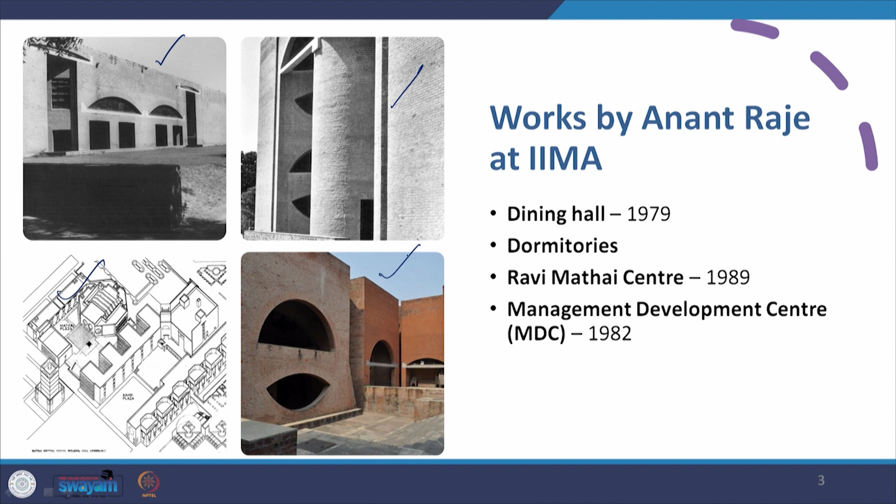The works of Anant Raje at IIM Ahmedabad include the dining hall done in 1979, the dormitories that he designed, the Ravi Mathai Center designed in 1989, and most importantly the Management Development Center, MDC, done in 1982. The MDC was left incomplete at Kahn's death in 1975, and it was completed by Anant Raje.

Raje showed due respect to Kahn by diligently employing his brick vocabulary. For example, when you look at MDC and compare it with the faculty wings of Kahn, you find a tremendous correlation between the brise soleil, or sunbreakers, provided on both facades. The only difference is the number of floors.

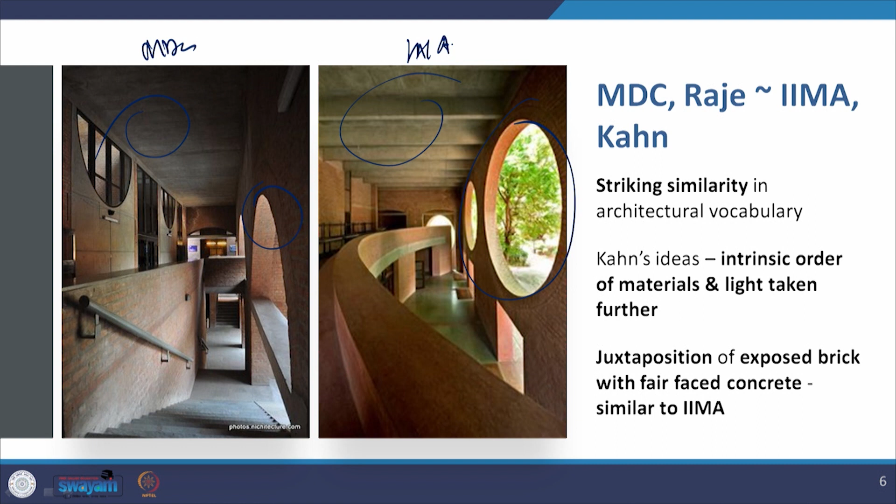Both have a brise soleil provided on a human scale, with a striking similarity in architectural vocabulary. Kahn's ideas of intrinsic order of materials and light were taken further by Raje. There is a juxtaposition of exposed brick and exposed concrete as in the works of Kahn, which Raje takes forward in the MDC. This is the example of IIM Ahmedabad, the main campus designed by Kahn.

So MDC happens to be a school within a school, within IIM Ahmedabad. It is a complex organized around a landscaped court, similar to the idea of the LIK Plaza, around which the institutional area of the old campus was designed.

So we have the LIK Plaza here, the lecture theatres, the library, the faculty wings, and the dormitories behind it. These three dormitories you see have been designed by Anant Raje, whereas this entire set has been designed by Kahn. So this is where the MDC is, the Management Development Center.

This is where the Ravi Mathai Center is supposed to be, and this is the dining hall that was designed by Anant Raje.

So here when we look at the MDC, what you find is two wings of guest rooms extending from the teaching block, and these are the long sides of this court like the LIK Plaza, but the quadrangle gets completed with walls enclosing the court, and then there are trees.

Now please remember what I told you in the last lecture, that the LIK Plaza, though not having a wall as the fourth side, does have trees at a distance that visually complete the quadrangle or court. Here in the case of the MDC, it happens practically - there are walls provided at the edge and trees behind it.

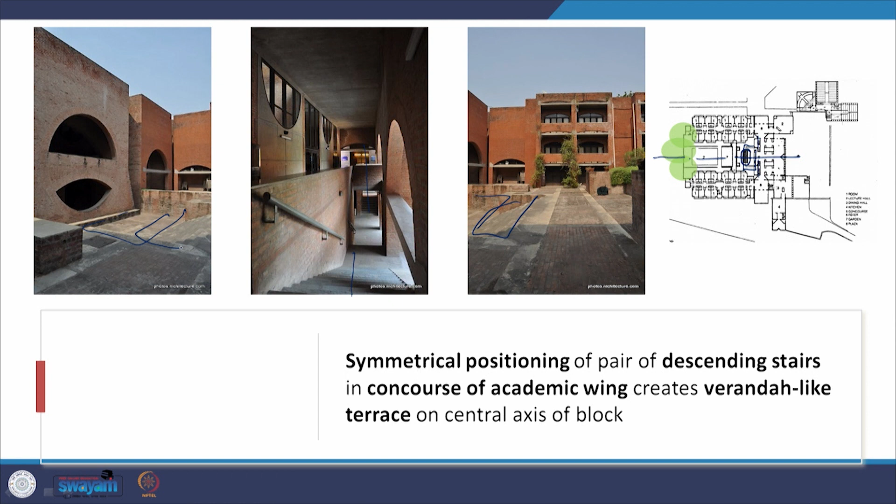Now there is a comparison between this and Newman Hall by Hasmukh Patel, which I taught you earlier. This also has rooms on either side, then a wing here, and this court or quadrangle is completed by the auditorium on this side. The vocabulary of the rooms is straightforward Cartesian brick, exposed brick and concrete structure, whereas the auditorium is totally different from the rigid symmetry, being a completely different geometrical composition that completes the quadrangle and becomes its focus.

In the case of Anant Raje, again there are rooms on either side. Instead of this wing, they have this entire academic block, but the quadrangle does get completed. This can be one of the visual devices you might find helpful in your design studio when you are faced with spaces like this.

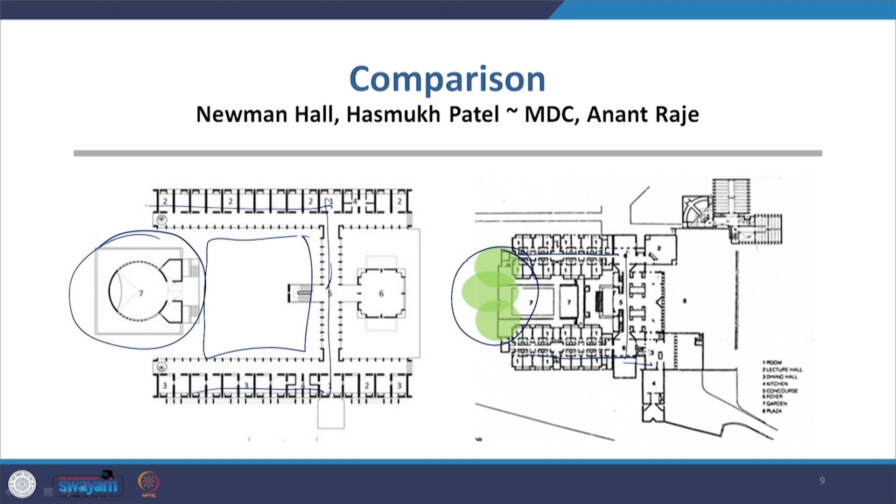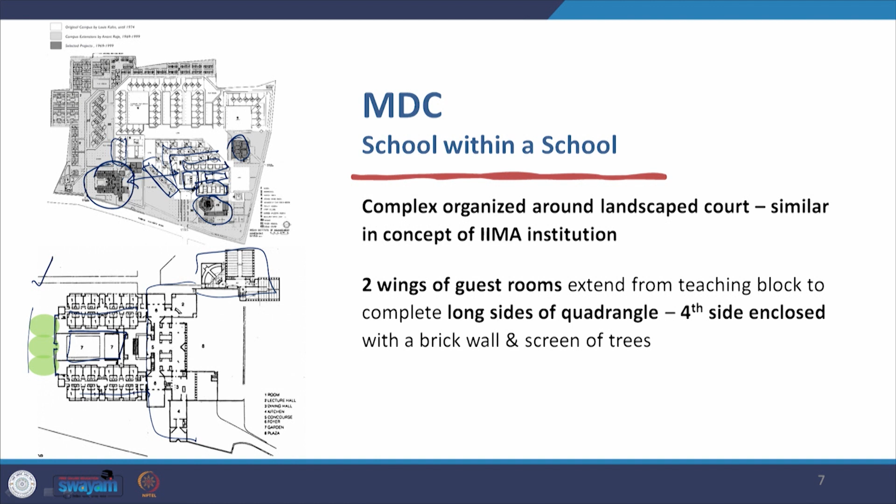The court itself is a scaled down version of the IIM Plaza, referring to the overall intimate scale of the MDC. If you go back to the actual plan of the complex, you find the MDC is planned behind the faculty houses and on the side of the dormitories. That is where the scale of the IIM Ahmedabad campus lowered to a more intimate scale, particularly in the faculty housing. So when he composed the MDC behind it, he was away from the monumental scale of the IIM Plaza's institutional area, and closer to the intimate scale of the faculty houses. My perception is that Anant Raje therefore went in for a more intimate scale.

When he brought down that scale, he also brought down the scale of the court itself, and increased the number of elements that would make it more intimate. This is a very interesting thing he is trying to do here.

He is trying to coordinate the court with the overall composition. In the IIM Plaza, the overall composition of the plaza surrounding buildings are on a massive scale, so the plaza radiates and accentuates that massiveness by being massive itself. If you move on to Chandigarh, it becomes even bigger, because Chandigarh is not just one big building, it is a series of big monumental buildings: the assembly building, the high court building, what would have been the governor's palace on the other side, and the central secretariat behind the assembly building. So the overall plaza accentuates the overall monumentality of that vast composition.

Here the composition and the plaza or court are linked together in their scale. This is important: if you were to provide intimate scale buildings with a monumental or very vast plaza or court, there would be this kind of disconnect, and the two wings of the court would be very difficult to connect together as one composition. You can take it or leave it, but this is a suggestion I am making—this is what Anant Raje does.

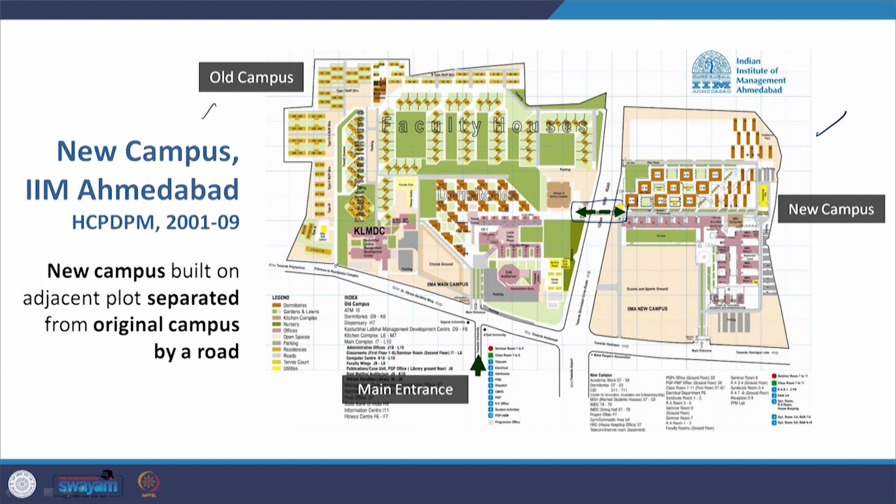There is the three-stage development: the main campus, which is the institutional area. You find the library, the theatres, the faculty wing, and the dormitories behind it from the aerial view. These are the dorms done by Anant Raje, and somewhere here is the MDC which you see, and on the other side is the design done by Bimal Patel.

So the three-stage development is the contribution of three amazing architects: Louis Kahn, followed by the next stage of young Indian architects, Anant Raje, followed by the generation of modern architects practicing today, Bimal Patel. Three wonderful architects at three different junctures coming in to complete the campus of Ahmedabad, all doing remarkable work in their generation. Both Indian architects evolved designs which are in relation to Kahn's design and pay tribute to it.

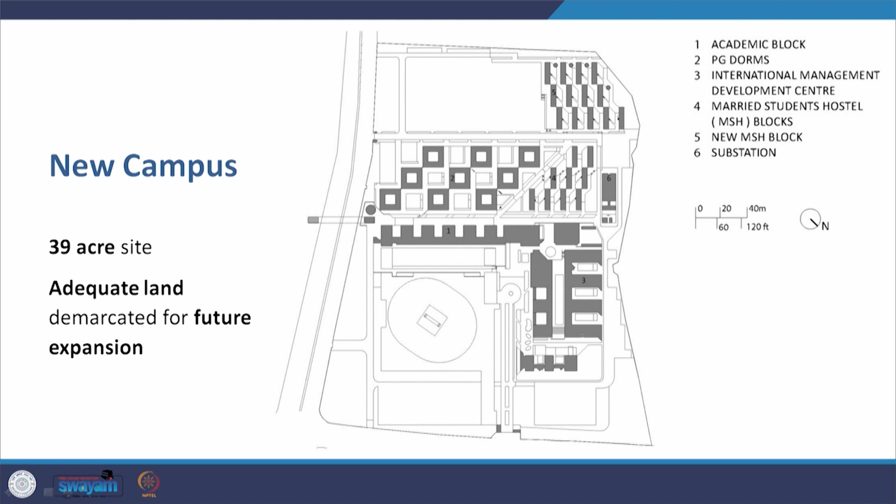The two campuses are connected by this underpass, and this pedestrian passage is a pivot that connects and binds the two campuses together.

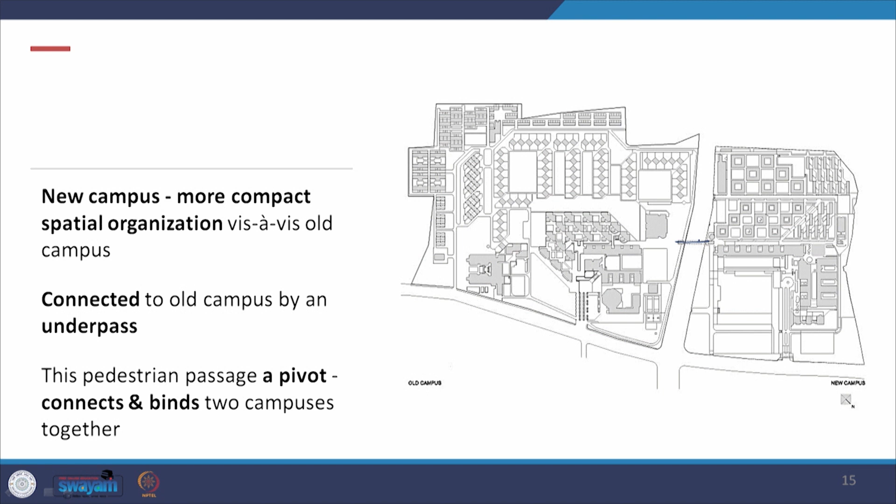Why the underpass? Let's look at that. It's a successful example to address the pedestrian movement issue while bridging disconnects within cities. In this case, it happens to be the same institution with two campuses with a road in between them, so the option of the overpass was overruled.

Why? Primarily because of the harsh climate. Having an underpass does away with the impact of the harsh climate, plus I believe it is also an aesthetic statement. An overpass may not have been as aesthetically pleasing; it would be an unnecessary intrusion on the visual at road level, whereas the underpass simply disappears.

Socially, it's been said that users tend to deal with descending first and ascending later much better than vice versa, which would happen in an overpass, where they would ascend first and descend later.

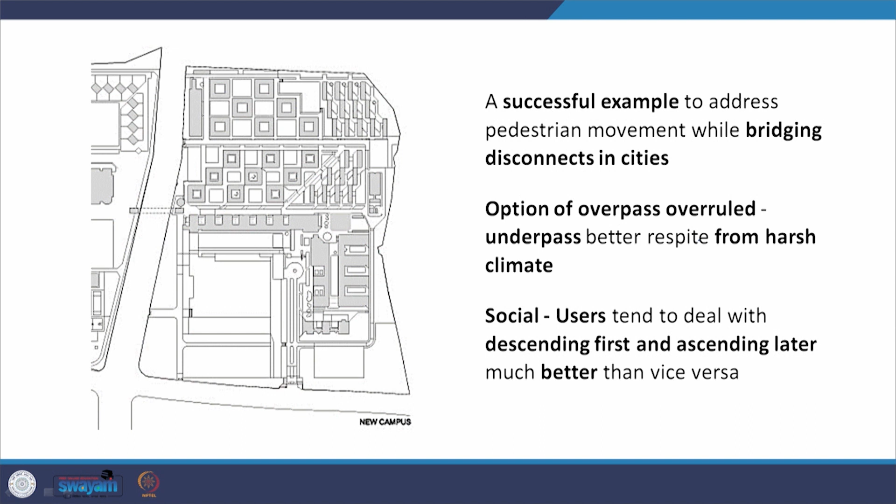This is a 130-foot underpass which also doubles up as an exhibition space for the institution, and it exhibits the works of Louis Kahn.

This is the example of the new campus, where you have the lecture theatres, you have the dormitories, and this is again part of the main block.

The focus on circulation is by using elevated corridors as principal ordering devices. They tend to bring the whole campus to a certain order by connecting them through the elevated corridors, which happen, for example, to be here. This is the same corridor, looking at it from a different view.

Why ordering devices, or why ordering principles? We'll have to go to Francis Ching to understand that through his book Architecture, Space and Order.

Order without diversity leads to monotony or boredom. Diversity without order leads to chaos. So the sense of unity has to be done within variety. Now that creates an ideal situation.

The ordering principles are visual devices that allow for varied and diverse forms and spaces of a building to coexist perceptually and conceptually within an ordered, unified and harmonious composition. This I am borrowing from the work of Francis Ching.

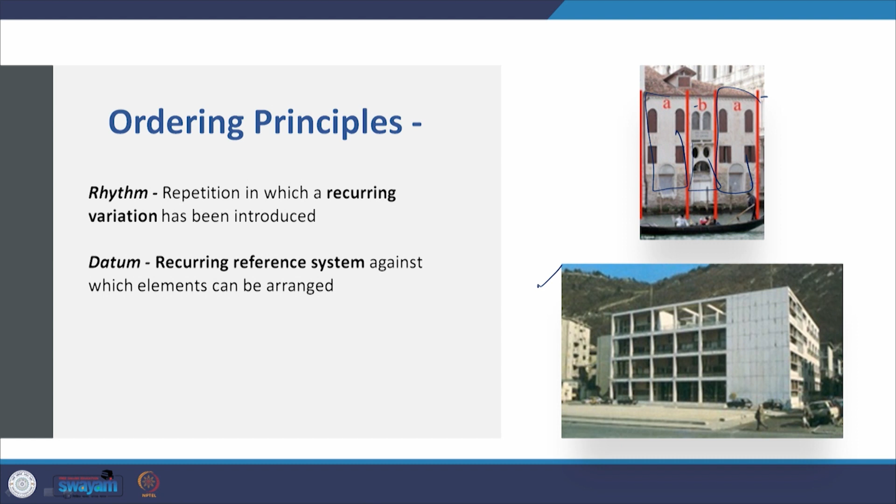Then there is datum, like in this building in Italy, which is a recurring reference system against which elements can be arranged. So we have looked at axis, symmetry, hierarchy, repetition, rhythm and datum.

Two things worth remembering: more than one ordering strategy can be used in a design—it can have axis and symmetry, rhythm, hierarchy, all put together. Also, there are many buildings and spaces not ordered purely by the six principles I've talked about; they may derive their order from other formal choices or general form-making principles.

In this case, the ordering device happens to be an elevated corridor. The architecture in general of IIM Ahmedabad's new campus is late modernist, maintaining consistency with abstraction of forms and geometric expression in relation to the old campus. The similarity is in massing—its monumentality with human scale—plus the overall composition itself and geometrical elements like circular cutouts, etc.

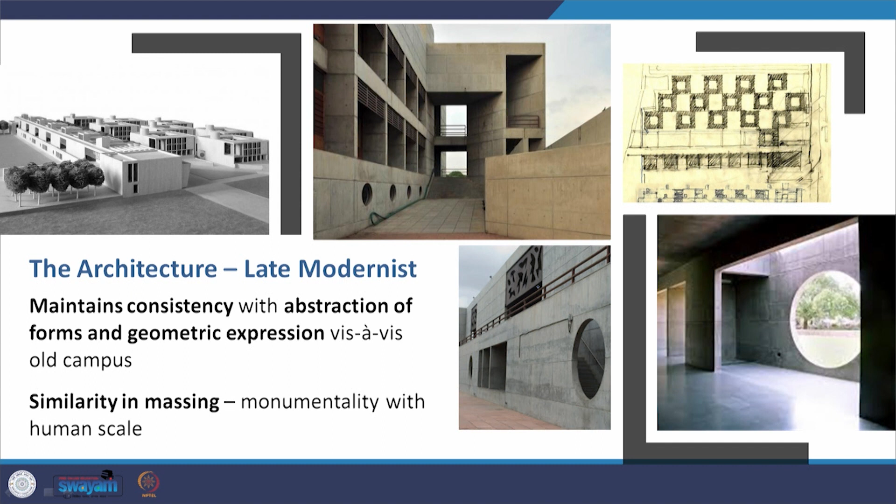We look at the position of the building on the new site, and the manner in which they connect with the old campus, like the use of diagonal geometries in the layout of the dormitories here in the new campus, similar to what happened in the old campus.

The use of materials and compositions uses abstract forms and large plain surfaces, along with circular cutouts similar to the old campus. There is an overall sense of restraint in the architecture. Even if the facade is monumental and expressive, it is completely unornamented, and the building material is exposed.

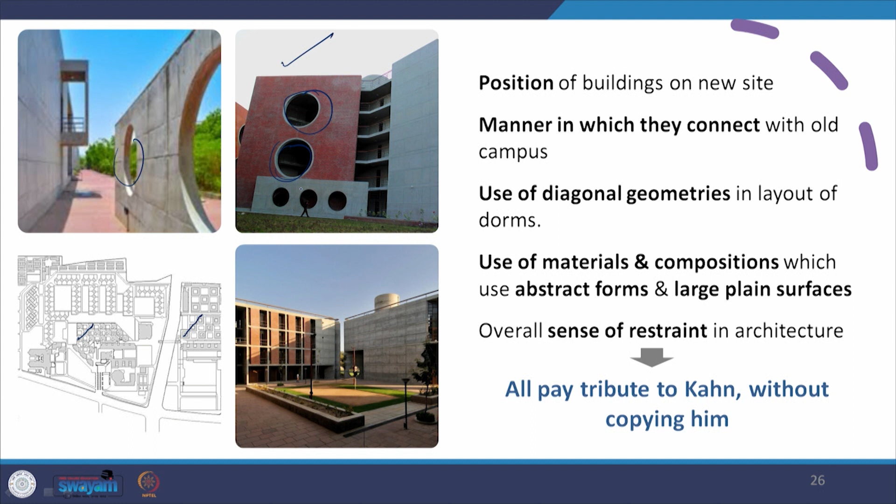All of this pays tribute to Kahn without actually copying him verbatim.

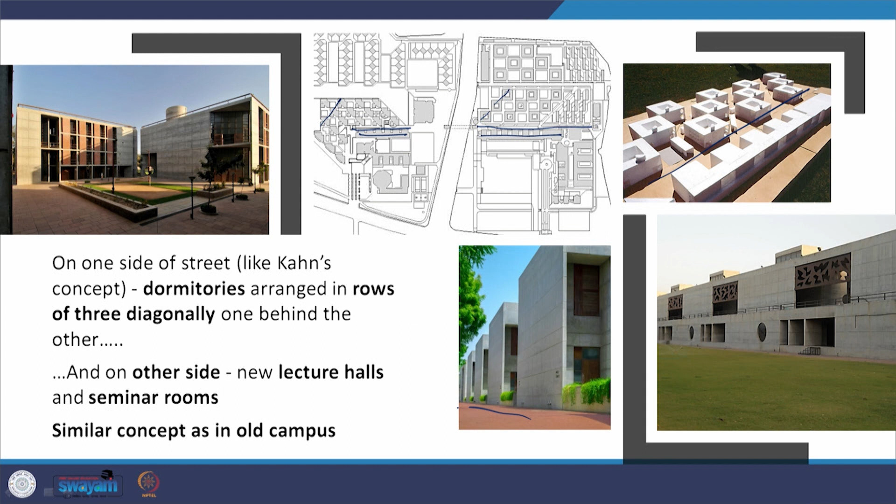On one side of the street, like in Kahn's concept, the dormitories are arranged in rows of three diagonally, one behind the other. On the other side are the lecture theatres, as in the work of Kahn. In between is a road, a vista similar to the old campus. The new campus is an example of architecture conscious of Kahn, but not imitating his palette or grammar verbatim.

The buildings are designed in exposed concrete and brick with fenestrations combining mild steel and wood. As in the old campus, the cutouts and fenestrations are generally devoid of any glass, standing in silence without steel or glass.

Of course, there are windows which we haven't specifically looked at, but here we see them clearly in the design of the dormitory. This is again a comparison between the visuals of the old and the new.

Look at this exposed concrete corridor of the new campus, and this amazing play of light on the brick facade in the old campus, versus the amazing play of light in exposed concrete by Bimal Patel. Bimal Patel is able to create the same poetry of light and shade that Kahn generated in IIM Ahmedabad.

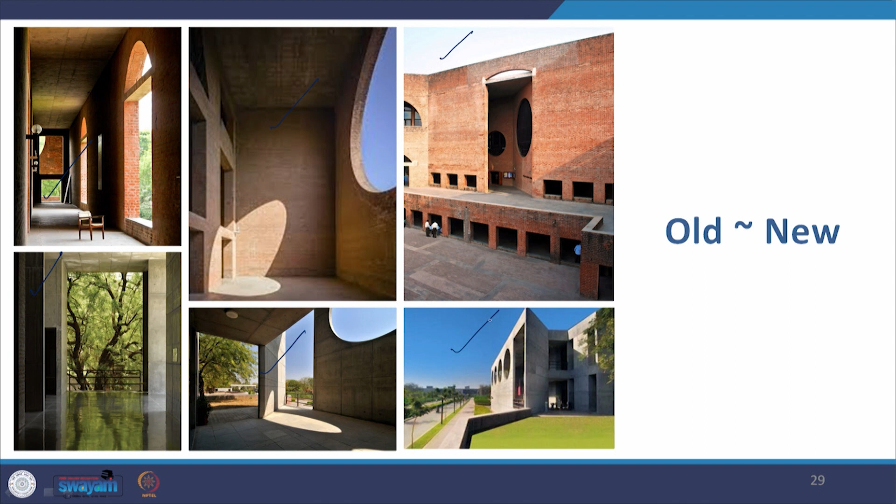There is this monumental facade with circular cutouts, found here in exposed concrete in the new campus, and again the example of diagonal walls that reappear.

There are deep verandas similar to both the works of Raje and Kahn. You find these deep verandas in the new campus by Bimal Patel, and the public areas are also designed for accessibility for the disabled. This is an addition in the new campus, since inclusive design has become an important focus today.

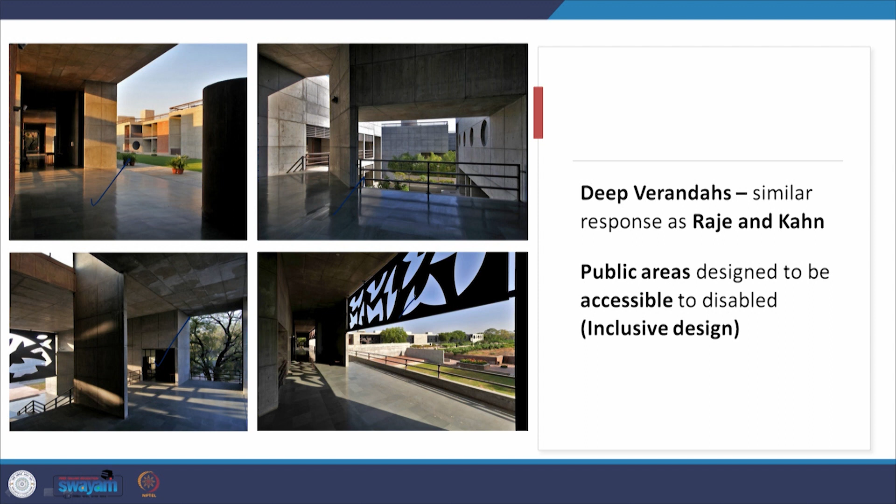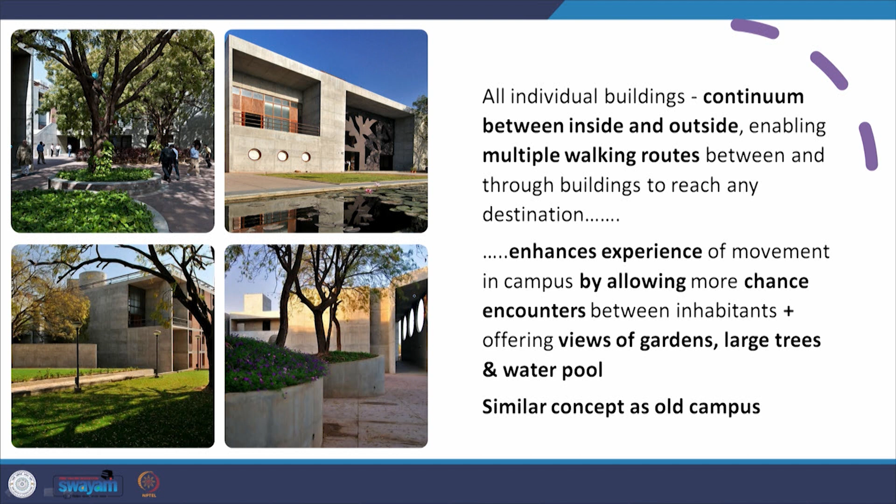All individual buildings form a continuum between inside and outside, enabling multiple walking routes through the buildings to reach your destination. This enhances the experience of movement within the campus, allowing for more chance encounters between students and faculty, and offers views of gardens, trees, and water pools, very similar to the concept of informal interaction between students and faculty in the old campus.

In conclusion, I would like to refer to the words of Bimal Patel: 'I wanted my design for IIM's new campus to be a homage to Louis Kahn's architecture, its austere grandeur, its geometric rigor, its spatial vitality, its clarity, its robust simplicity, but I did not want to imitate his architecture, but to develop a new vocabulary that was my own.' And in a way, he has been able to do that.

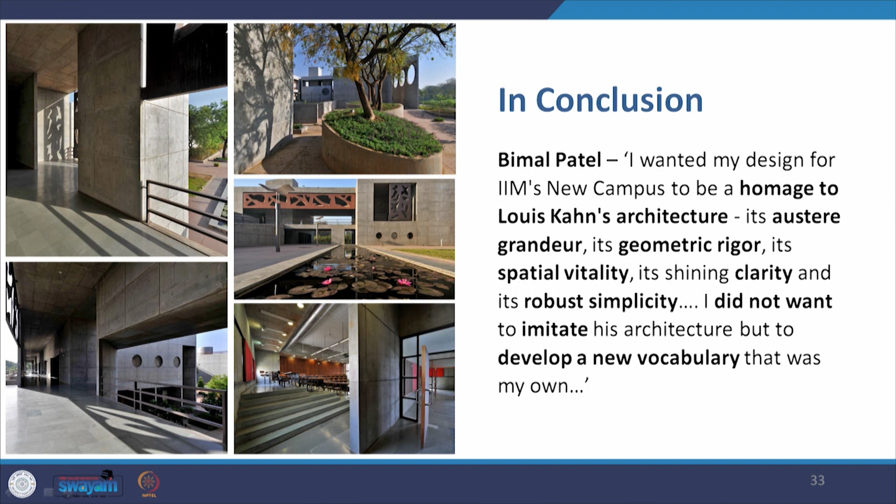It is a reflection of the old campus without being a mere copy of it. It has its own vocabulary which clearly shows the connection, but stands out as an amazingly wonderful project in its own right. We will end here, and continue with some of the other works influenced by Louis Kahn in the next presentation. Thank you.